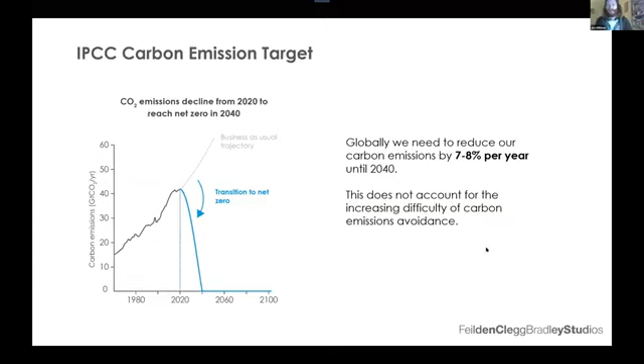Now, I don't show you this to say, gosh, it's insurmountable, let's just call it quits. Actually, it is really achievable, but we need to think about it and make direct actions towards it. It is entirely doable. There'll be a bit of technology, and we'll have to address a lot of our common concepts and things we're used to doing, but everything needs to start with numerical evidence, which is why it's so great to talk about these things today.

So net zero carbon is something that's touted around. I'm not going to delve too much into this. This is the UK Green Building Council net zero framework. Really very good, probably the only kind of framework that's currently out there in the UK. There are other bits kicking around, but this is really quite a robust one. It has 2 sections: construction and operational energy, which we're going to talk about.

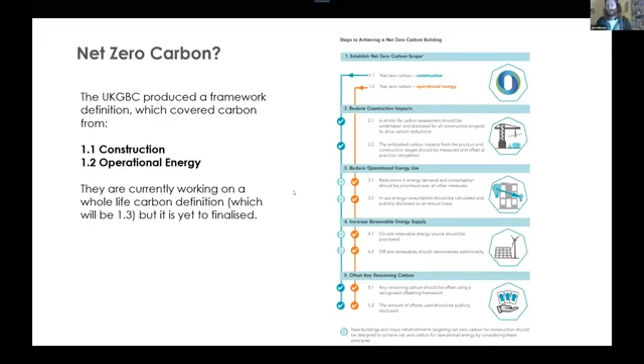Because it's not always like that. We're getting to around a third of the year, tends to be around that kind of area. So it tends to be renewable over a third of the year. It's quite amazing, and we are getting a lot better from it.

And if you look at it hour on hour of the day, you can see those peaks and troughs when it gets windy and sunny, when people use lots of energy. And there's a really interesting point - so Adam mentioned thermal batteries when we were chatting earlier.

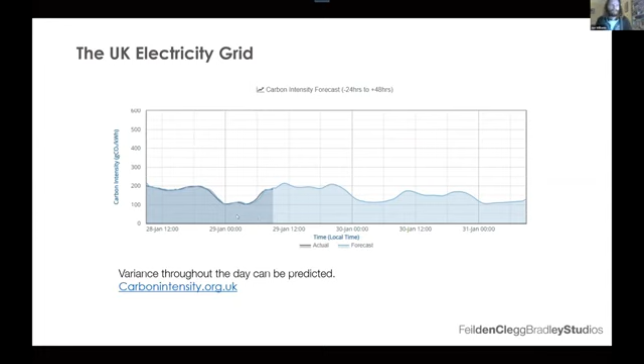You can see there's a reason batteries might be useful. If I start to get energy when it's low carbon and then release it during the day, all of a sudden maybe you can halve your carbon footprint. And similarly, I can also schedule stuff to run at night. So rather than running my dishwasher during the day when it's high carbon intensity, I can run it in the middle of the night. It'd really annoy my neighbors, but it's probably the right thing. I'd halve my carbon footprint for my dishwasher or whatever else. What an amazing idea - really super simple, just a timer plug.

But this is what's driving our push towards electricity. If you install an electric system now, in the future it will become nearly zero carbon. It never quite gets to zero - there are lots of complex grid effects that caveat that.

So you can see already we're going to be looking at things like changing heating technology, moving away from gas boilers, ideally aiming for heat pumps. There's a big caveat here as well - we could use electric radiators. If you can get your heat load down far enough, actually electric's not so bad. But heat pumps really are the future. Every kilowatt of energy you put in, we can get 2 or 3 out for heat, from thermodynamic magic.

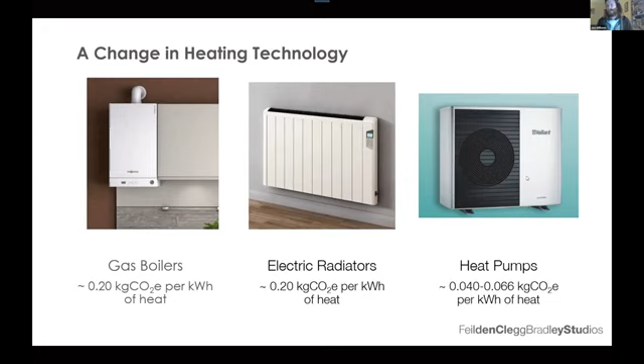We can't just avoid the fact that we can't build rubbish buildings that need loads of heating. We still have a fixed capacity for how much energy is in that grid. If we don't pay attention to that, we won't have enough renewable power, and therefore we'll never have green grids. So we still need low energy buildings. And this is what that 35 from LETI - that's where that figure comes from. That's what we have as an acceptable allowance for new buildings.

So we still need to use things like heat pumps, all these little steps. I'm sure James went through these - have a look through the Climate Emergency Design Guide, have a little review of it. It's got some great stuff in there.

And once you've got all that done, you can throw a PV panel at it and your renewable tech. This is a little table I use - this is for Leeds, it's as close as I can get to Sunderland. It's not too far off.

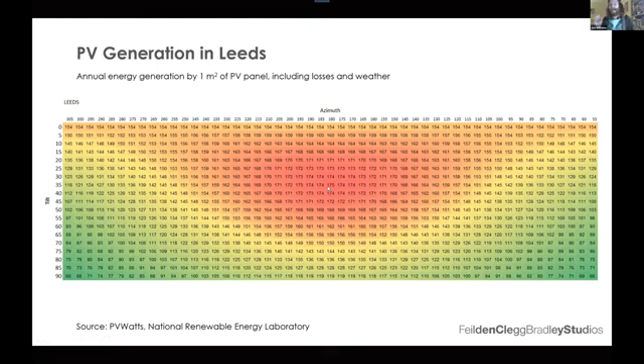It's probably fine - actually Sunderland is probably slightly sunnier than Leeds because it's on the other side. But this tells you what way your solar panel is facing - so 180 would be directly south. And this tells you the tilt - so 0 degrees would be completely flat and 90 degrees would be perfectly vertical. You can see exactly how much your PV panel, including all the losses and conversion bits and pieces, will generate for you per meter squared. So a really useful little table - you can see how much you can generate from there.

So that's enough about operational energy - you've already heard lots about that. We're here to talk about embodied carbon.

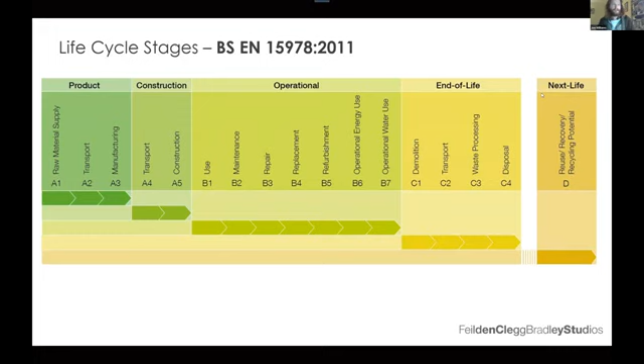Jane is going to talk far more about this, and it's probably a slightly more accurate version of this table. I call this Next Life because it seems a bit more friendly. We're going to talk a lot about these bits, so I'll skip on because it'll become clearer later.

What we're really saying is with these buildings, it used to be that two-thirds would be operational energy. When we look at ultra-low energy buildings we now have to design, it's actually nearer a quarter for a house. But 50% of the carbon emissions from that building over 60 years will be emitted even before it's left the factory.

The contractor hasn't touched it. It's still sat in a warehouse waiting to be bought, waiting to be used, and 50% is already gone. Then you can see these bits: transport to site, wastage, then maintenance-related aspects like ongoing replacement and refurbishment, and about 2% depending on what happens at end of life. So it's really important to capture these bits. Where do we need to focus these aspects?

A lot of it is related to the structure—that tends to be where it is. It depends on the scale of building. When we look at big offices, it's nearly all structure. But as soon as you get down to smaller houses, your structure becomes your facade, and you find that your facade is working incredibly hard. As a consequence, you can have an awful lot of embodied carbon in it, particularly per floor area. It's a useful starting point.

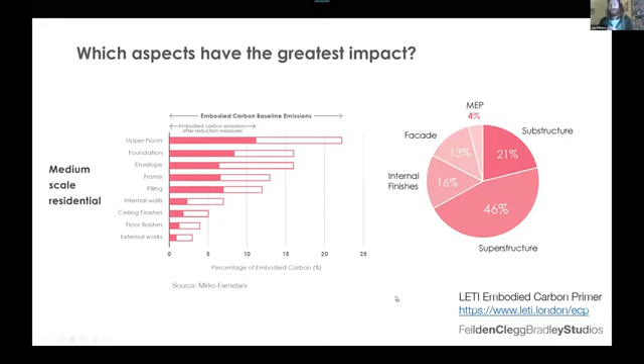Again, this is from the LETI Embodied Carbon Primer—well worth a read, it's got some great figures in there. I'm sure Jane will talk a bit more about some of these bits.

Before I hand back to Adam, I just thought I'd give you a quick idea of some really simple embodied carbon actions from the LETI Embodied Carbon Primer. ACAN have got a new guide coming out very soon on embodied carbon which looks amazing, well worth a read. I think it's coming out soon—I'm sure Seb or Sam can pop something in the chat.

Firstly, build less—do you need a new building? That's the big thing. Build light: reducing the weight is an easy win, and you also save costs. Build wise: look at the site constraints, what do you need to do?

Build low carbon—where you have to use a material, can you use a better one? Build for the future too, with dismountable, flexible designs; we put a lot of resources in, so can we make sure those resources are useful in future? And build collaboratively—we quite often sit in our own silos, which is why this competition is so exciting, working collaboratively to get the best responses. It shouldn't be architects designing the building and engineers just making it work; we need to work together to find the most optimal solution.

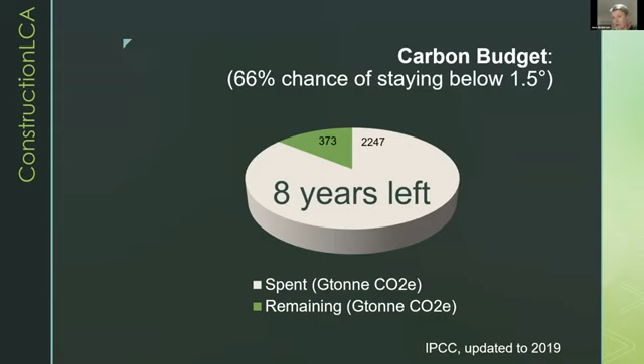The slower we are, the more we're going to have to do to mitigate and, if you like, dig ourselves out of the hole by trying to reduce the amount of CO2 in the atmosphere by even more drastic means, rather than just being able to reduce our emissions.

So, you know, when I first started looking at these kind of things, I did my master's and started down this route in 1997. If we'd started trying to reduce our carbon emissions then, we could have had a nice, slow, gentle curve. Unfortunately, we're now here where this curve is really, really steep. And everything that we do has got to be, you know, we've got to do the maximum. So it's unfortunate, but we really do have to act like our house is on fire, as they say.

The other reason why embodied carbon is really important, we call it the lock-in effect. If you think about when you're designing a building, if you're looking at operational carbon, whatever system you put in, you can put more insulation into your loft, you can put a more efficient boiler in, you could swap from your gas boiler to an air source heat pump in the future, and the grid is going to decarbonize. So it's better if you really act now to put as much insulation into your building and really focus on reducing operational carbon. But it is possible that you're going to be able to make changes.

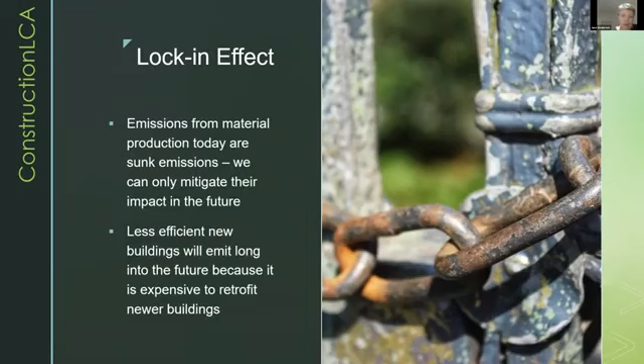And then we transport them to the site, and we look at the processes that actually occur on the building site. And we call this upfront carbon. So it's basically carbon that happens before you actually get into your building. And embodied carbon is upfront carbon, and then all the carbon that's associated with building materials through the life of the building. So any repair, replacements, maintenance, and refurbishment.

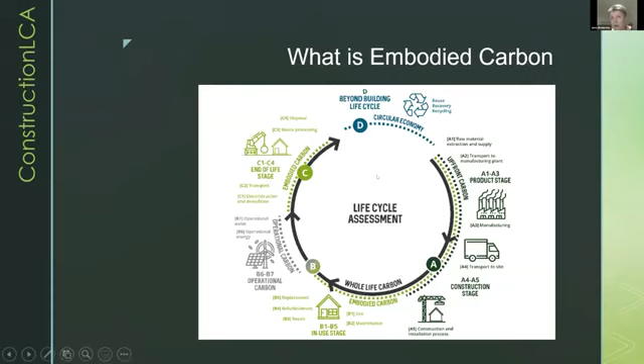Why is it important? Jack showed you the 11% in terms of global emissions from construction. In the UK, there's lots of different figures, but somewhere between 7%, 10%, maybe even 15%. It kind of depends how much you're taking into account things like imports and how wide you go and how good the information is. But it's certainly a substantial part of our impacts, and there is nothing at the moment that's limiting that in terms of the impact of buildings.

Jack showed you a breakdown. I'm going to show you another one. This is for a house. Again, a lot of the impact here from foundations and the ground floor, the kind of structure for a house. You've also got the external walls, internal walls, and then the windows and the roof. And then this is MEP and services, so things like your boiler, the pipework, electrical systems, and then floor coverings, finishes, paints, things like this.

And again, in terms of the balance, this was a house built to above building regs, but you're still seeing that the operational carbon is a lot. And that again is why there's real focus on reducing operational carbon. Rightly, the building regs don't go anywhere near far enough, but we also need to address this embodied carbon. And in studies where people do look at this, it's very often very easy to make reductions in embodied carbon of 20, 30, 40% without any additional cost, just because it's something that people haven't looked at, and there are lots of ways of making those savings.

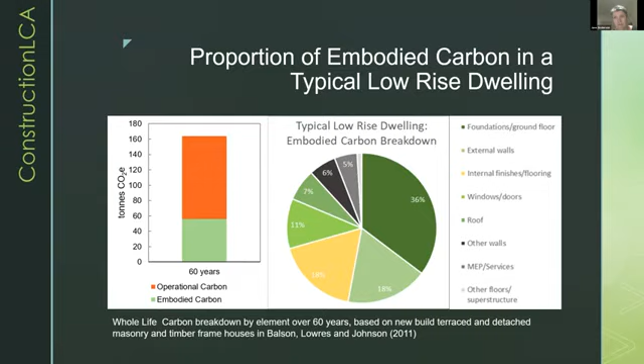What are the benefits? So again, if you're looking at trying to measure and then reduce embodied carbon, it's very often linked with cost savings. One of the biggest ways of trying to reduce embodied carbon is looking at efficiency, not wasting materials, not using too much material, trying to get a material to do more than one job. And if you're able to use materials more efficiently, then that will come with cost savings.

It hopefully is a good thing in terms of meeting climate obligations. We've done work with housing associations recently, and they're now able to actually access much lower rates of interest if they're able to demonstrate that the housing that they're producing is really good in terms of the climate impacts. So it actually pays back in terms of getting money to build more cheaply. And it has benefits in terms of the circular economy, because materials that have higher recycled content or that can be recycled will generally also have lower embodied carbon.

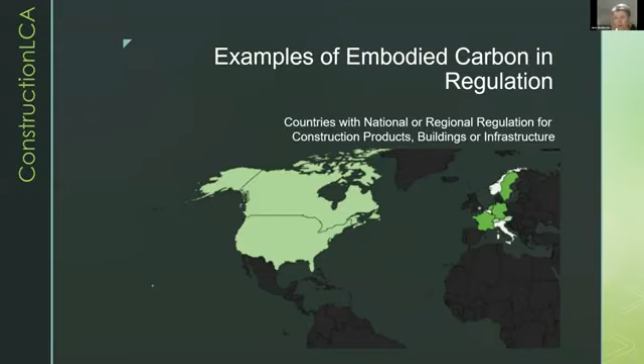But in lots of other countries in Europe, in France, in the Netherlands, in Finland and in Sweden, they have regulation. They are required to report embodied carbon, to make reductions and to meet particular targets. And there are other countries, Belgium and Italy, where they link to embodied carbon in their regulations for some of their products. And there are also lots of places in the States and in Canada where they are focusing on this and have requirements for either products or their buildings. There is a great resource called Embodied Carbon Policies that tells you all about the different policies that countries, cities and states are using.

I'm quickly going to run through how we look at construction products, because that's obviously what buildings are made of. So how do we do that? The way that we do it is using life cycle assessment. But we have something called product category rules, which make sure that when we assess products, we're using exactly the same method so that the results are consistent and we can make comparisons. And the result of that is what we call an environmental product declaration, or an EPD. These are the pieces of information that give you the data on the embodied carbon of products.

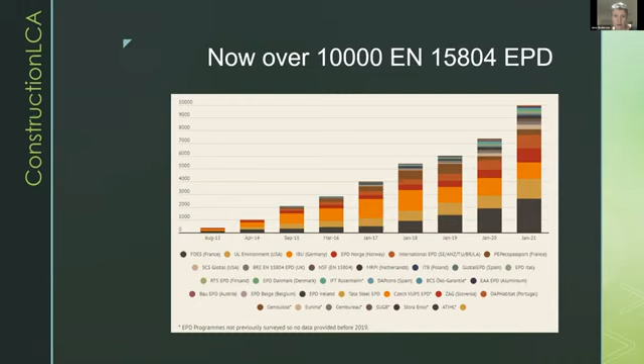There are, in fact, another probably 30,000 EPD that are using an international standard. Most of those are for concrete. In the States, there are now just thousands of EPDs for concrete, because there are tools and ways of searching for them that make it possible to actually try and find a concrete with a very particular environmental performance and technical performance within a certain number of miles of your site location. So we've seen it really explode in the States, and hopefully at some point that might happen here.

This is just to give you an overview of all the different types of products. There are a lot of insulation EPDs, lots of floor coverings, but pretty much now there is an EPD for almost every product. You do have to look for them. I'll give you a link to an information paper that gives you some ideas. There is one coming that's actually talking specifically about UK products.

I think the easiest thing is to have a very quick look at one, and hopefully this will work. So can you see an EPD icon? That's great. Excellent. Okay, sorry. Make it take up a bit more screen.

So this is an EPD for UK produced brick. It comes from BRE. The important things to know: EPDs are verified, so somebody's actually checked that the data makes sense and that the PCR that I mentioned has been followed, so the data accurately follows the methodology. EPDs will tell you who's produced them. So this is for the Brick Development Association. It'll tell you when they're valid, so you know that they're relatively recent. And they also tell you what rules they've followed, who's done the work, and what they cover.

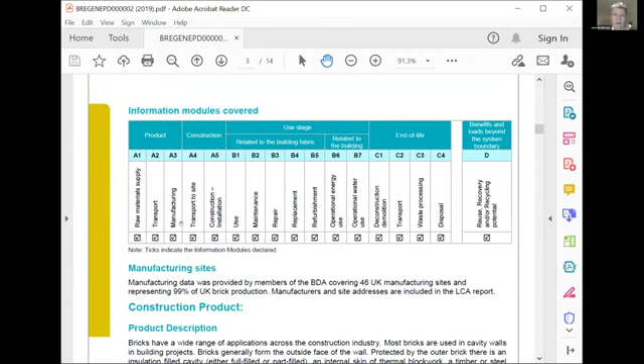So this is for 1 ton of brick. It's telling you all the impacts over the life cycle, and it's the UK sector average. So it takes data from all the manufacturers in the UK, and that's the proof here that it's been verified. You saw the list that Joe Jack showed you. Again, each of these are ticked, so it's giving information over the whole life cycle for the product. It's telling you that it's come from 99% of the UK brick manufacturers, 46 sites. So it's an EPD with really good coverage.

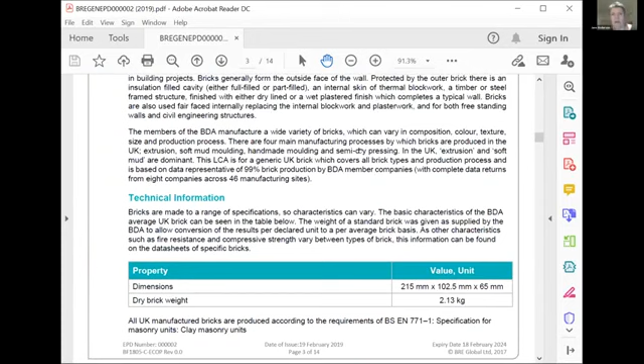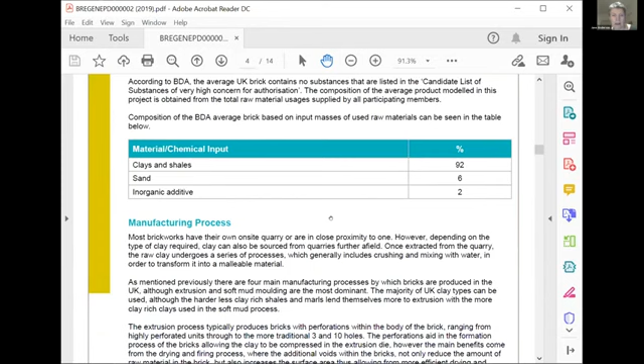It tells you what a brick is. Maybe not that useful for a brick, but it can be really useful for other types of products to make sure you've got the right thing, and explains technically the size of the brick, how much they weigh, what standards they meet. What goes into it for a brick is basically clay, sand, and some inorganic additives, and how you make it. And you've got a nice picture there as well.

So EPDs follow different formats. All the BRE EPDs look like this and are in the same order. Different EPDs in different countries will have different formats and different orders, but they will all give you this type of information. So once you know what to expect, you'll find it. This one tells you how long the product is likely to last and what's going to happen to it at the end of life. You've got this repeated, it's for a ton.

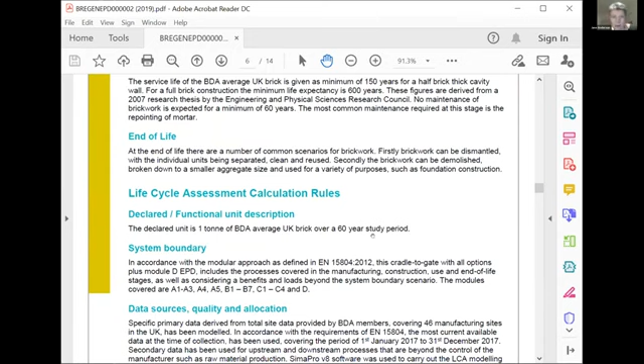And then where they got the data, who gave the data, how they collected it, and what tool they used, and basically that this one has included all the processes. EPD have to include 99% of the impacts where the manufacturing occurs, and they're not allowed to exclude anything intentionally.

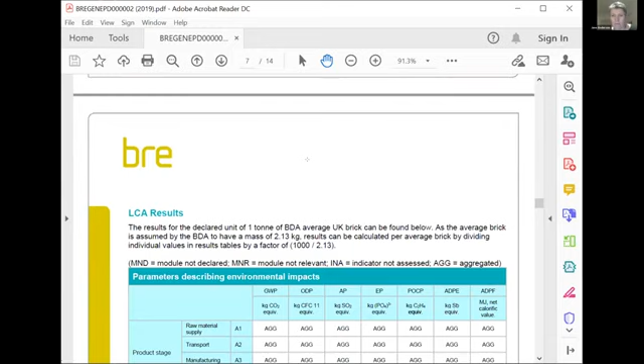So that should be the same thing. This is the meat of the matter, where you get the environmental impacts. And GWP, global warming potential, this is basically your embodied carbon.

It doesn't say embodied carbon, but you want to look for the global warming potential, and it's measured in kilograms of CO2 equivalent, which is the same unit as embodied carbon.

So for this EPD, they've aggregated the impacts of extraction, transport, and manufacturing. This is what we call cradle to gate. So one ton of bricks releases 213 kilograms of CO2 - that, if you like, is the embodied carbon of a brick when you make it in the factory.

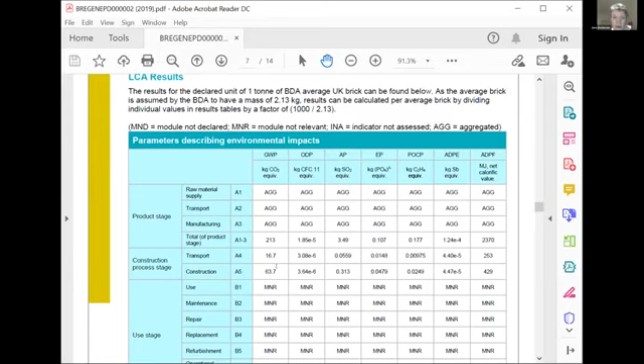Its upfront carbon would be all of this impact here - the transport to site, assuming a certain amount of wastage on site, and the impact of disposing of that, or taking it to be treated, recycled, and crushed, for example, for use as aggregate.

These modules here, they say 'module not relevant'. Basically, once you've put a brick into a wall, you actually don't need to do anything over a 60-year life of a building, so there is no information recorded here.

At the end of life of the building, then you've got the impact of taking it to recycling and then waste processing, and a very small amount of it going to landfill, and then you've got the benefit here from being able to recycle it.

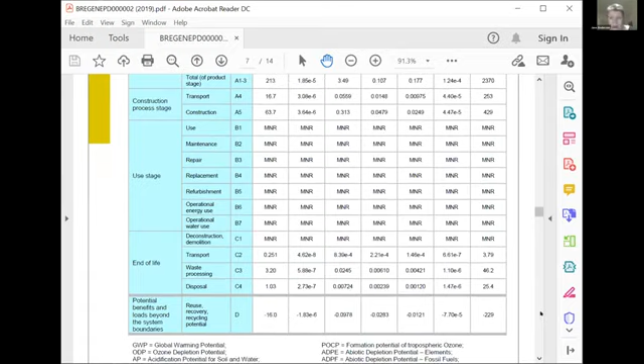There are lots of other indicators. I won't go through them because they're not particularly relevant to embodied carbon, but there are lots of other indicator results.

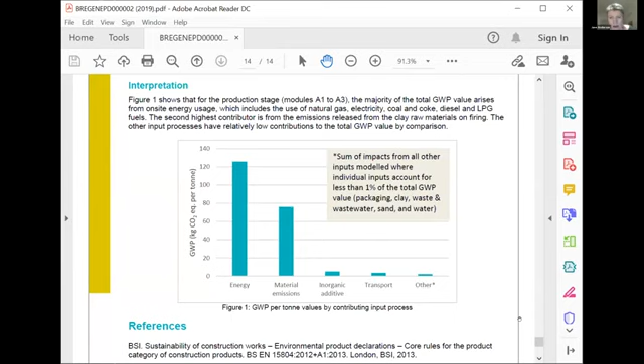And then at the end of it here, it actually describes these scenarios, so exactly how far bricks travel and what happens to them at the end of life. It gives you some quick graphs so you can see what's causing the impacts, and then it's got some references.

So that's basically a very quick view of an EPD, but effectively you want to look for the GWP information if you want to compare the embodied carbon of different products.

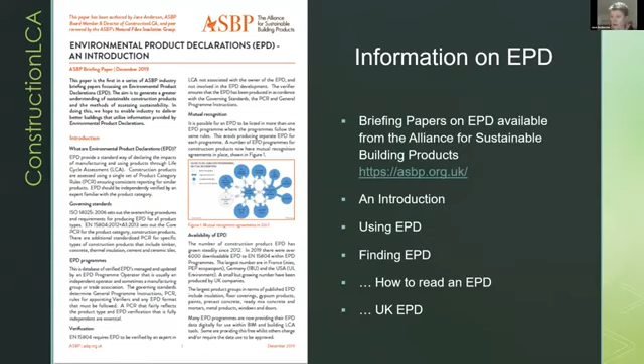Other sources of embodied carbon data include the Inventory of Carbon and Energy, a database that Craig Jones produced as part of a PhD and that he's now updated at Circular Ecology. For the main core materials, like timber, steel, concrete, glass, and gypsum, he's used available EPDs to generate typical values for common materials in the UK. So it's what we call a generic data set.

For other materials, it's using older data, although he's in the process of updating that, and hopefully there will be better information, but I'm afraid not for this project. This type of generic data is good when you don't know exactly what product you're going to be using. When you get to your detailed design stage, then it's really useful to start looking at individual EPDs and try to find the very best product of that type.

So, embodied carbon for buildings. The really important thing when you're looking at measuring and reducing embodied carbon is that the sooner you start, the more likely you are to be able to make big savings. This embodied carbon reduction potential is really, really big when you're in the planning and concept design stages. It gets much lower as you get through design, and when you're actually building, it's really limited what you can do to reduce embodied carbon at that point.

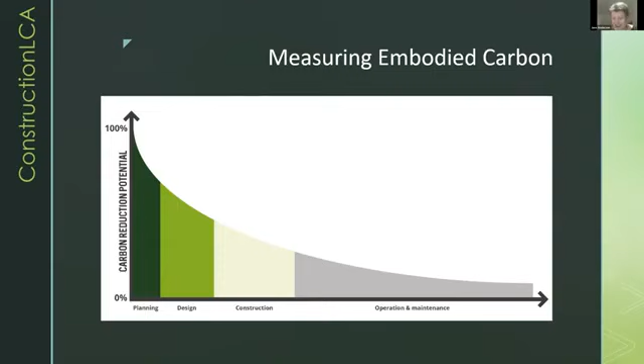Then you've got small opportunities as you're going through the life cycle of the building to make changes when you're replacing and maintaining components. But here is really where you need to start. So it's great because you're right at that point right now. Hopefully this is information that will be really useful.

It's their professional statement on whole life carbon, and this basically gives you all the default values for how far to assume goods or materials are transported before you actually work out which factory you're going to get it from, what to assume for the recycled content of steel, these types of things. So this is a really good guide.

And a lot of the tools, so the tool that Joe Jack is going to show you, is following this methodology.

Here again you've got this breakdown. So the building is using the same modules broken down into the product stage, this upfront carbon. Then we've got the in-use and end-of-life stage, and then this module D and the operational carbon. So your embodied carbon is everything in here, and your upfront carbon is just these first five modules from module A. The other thing to know, probably too much information, but in upfront carbon, when you're looking at products like timber that store carbon in them, that stored carbon is not included in your upfront carbon, because you're not looking at what happens to it at end of life. But in embodied carbon, it's included as the benefit of the carbon storage coming into the building, and then it's released at the end of life.

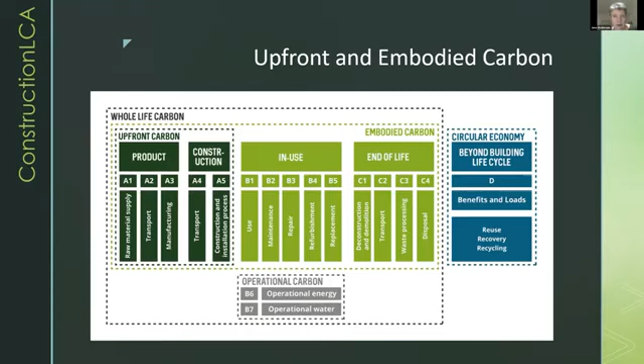So I've got a complicated way of trying to show that in a diagram, but it's too complicated at the moment still. There is lots more guidance.

Joe Jack mentioned the LETI Embodied Carbon Primer. It's a really good introduction, and it's got lots of really useful information at the end about different materials and about reduction strategies.

There are lots of embodied carbon tools, and lots of them are free. If you're students, probably even more so. Joe Jack's going to talk to you about FCBS Carbon. There's also eTool, which is free, and the tool that Tim Martel is going to talk to you about, the Passivhaus RIBA AECB tool.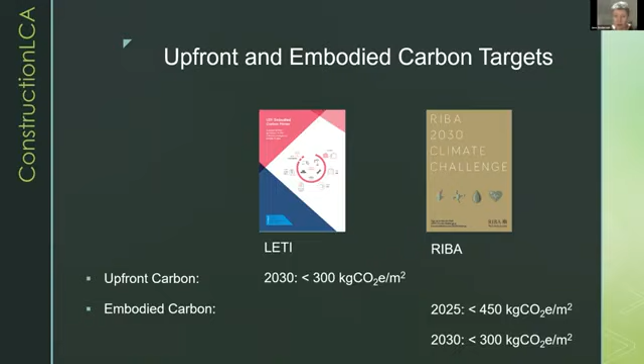It's a really good idea if you can minimize the energy demand that you have. If you really focus on that, then you will need less PV and potentially less battery to operate your building, and you may find it easier. So it is a real challenge, but it would be really good if you could be getting these kind of scores.

Embodied carbon and timber - I've talked a little bit about this. Basically, each cubic meter of timber sucks up 1,000 kilograms of CO2 and releases quite a lot of oxygen as well. So it's storing just over 250 kilograms of carbon within it, but a ton of CO2.

If you put it into your building, it's basically stored out of the atmosphere for the life of your building - we say 60 years, might even be longer. And at the end of life, it's even quite likely that it could come back. For example, structural timber can be chipped and put into chipboard.

They could be reused as rafters and beams, or chipped and put into chipboard, and then used in furniture or flooring, something like that. Then they've got another 15, 20 years potentially in a building. So it is a really good idea if we can do that.

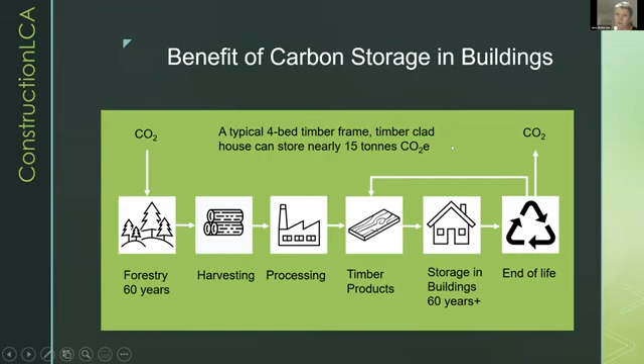A typical 4-bed house can be storing nearly 15 tons of CO2. So this is using timber efficiently.

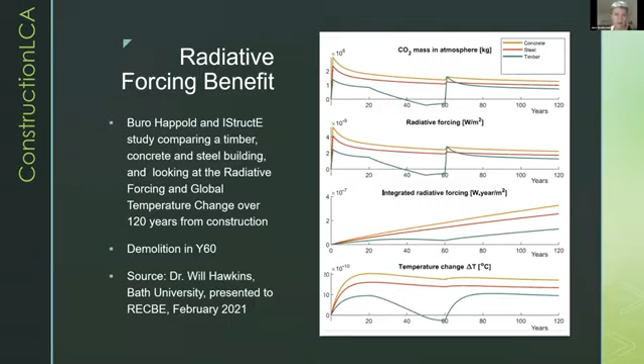So good luck. Think about what you're going to do, design well, then assess it, review what you've got, look at the hotspots, try and reduce it, and just keep going through that loop, and hopefully you will achieve your target. So thank you very much.

Thank you, Jane. That's really interesting. It showed us just how much detail there is. I had a couple of takeaways that I'll just flag up there.

One for me, I was really interested to hear you talk about the simplicity of buildings, because actually the simplicity of buildings has real advantages for operational carbon as well. And you know, all you've got to do is look at some of the award-winning Passive House schemes out there to see that actually simple buildings aren't boring. They could be done exceptionally well.

And the other thing that you highlighted, which really resonated with me, was the importance of collaboration with M&E engineers and structural engineers, and how this is a real team effort to make real inroads into embodied carbon. That's one of the great reasons these design teams are running this competition. So I look forward to seeing some of the results.

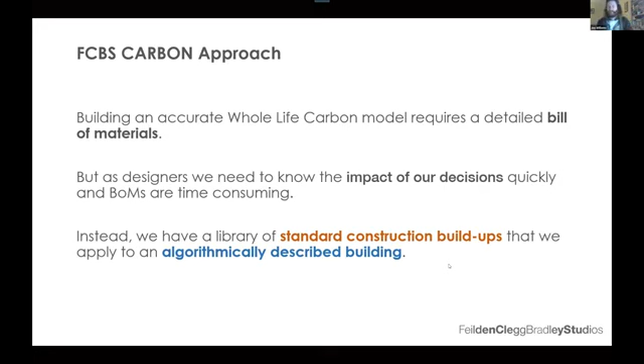And we did it for 3 reasons. We made this tool - one was just to kind of record the details of the projects. We wanted to know how we were doing. Seems like a simple question, but it's kind of difficult when you've got 4.5 offices, 200 people. Keeping that going is quite tricky.

We really wanted to be able to estimate the whole life of our projects. But also, I think third is to understand how it works. We've got a long history of sustainability, and that's absolutely great. But we're always trying to keep on top of these things, and we need to be able to educate everybody in the practice and let them find things out.

It's great for me to talk and tell you, you should use 70% GGBS for your concrete or whatever else it is. Actually doing it, you'll find out so much more. So I needed some way of enabling the architects in the practice to do it.

And I realized that people didn't really like BIM or Revit, and they didn't really like all these kind of plugins for tools, and I'm not the greatest developer in the world. So I made it in Excel, because everybody loves an Excel sheet.

And the key thing here is that it's not ridiculously accurate - it's kind of fine - but we need to understand the direction and magnitude of changes when we make a design choice. So if we go from, going from a basement to having an extra story on top, is that better or worse? Actually, it's quite a difficult question to answer.

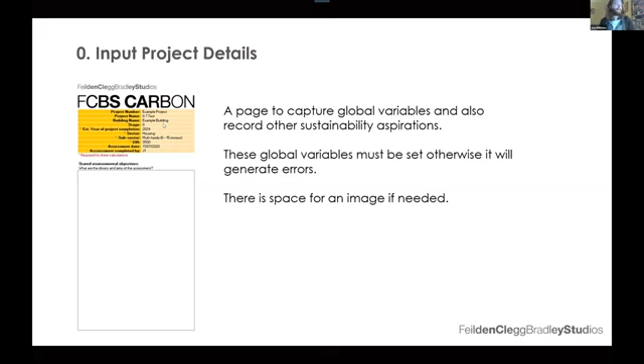It's kind of live. So we input operational energy. This is the least smart bit of the spreadsheet. It's got a nice snazzy color scheme, but that's about it. It's got some nice graphs as well, I suppose. You just have to manually pick it.

There's a bit here which is benchmarks, and it'll tell you what we think the industry is doing, and this is based on kind of CIBSE, or in this case for housing, it would be based on a bit of study done by Etude, just showing where you are. Now we have a kind of target that we're going to be aiming for. We're all aiming for 35 kilowatt hours per meter squared per year because we're all going for the kind of LETI targets. So that's a nice easy win, we'll pop that in. The very fact that it's very difficult to get to is another story - we'll come to that at some point.

And this is the kind of clever one. This is the one where all the stuff happens. You have a bit here where you put in building parameters, sort of general global parameters for your building, if you like. And then down here, you can select all your materials, and I've got a preset list. You can say whether it's new, whether it's existing, so you can use replacement bits. You can say if it's old, how old it is. You can say how long it's going to last for in terms of component life.

You can use this adjustment factor, which for all intents and purposes is a fudge factor, which makes it work for your building. And design for disassembly. So if you're going to have design for disassembly, we can start to capture those elements and represent them as a benefit beyond the system.

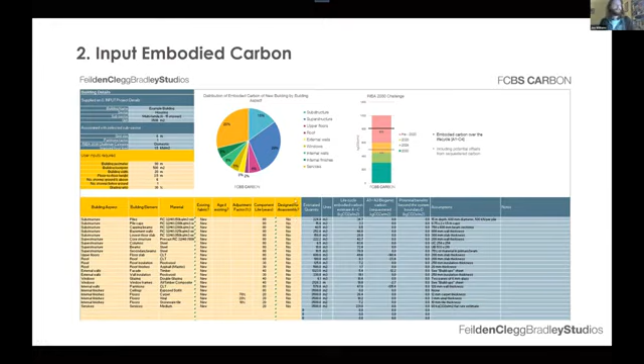Just so you know, where we say your facade is going to be ceramic cladding or whatever else it is, there is a whole model that sits behind it. So we have ceramic cladding, but we also have the steel framing system that holds it in place, and all those bits that hold it back to the wall. So all of that comes in there. So whenever you pick a material, there's actually a little bit extra within there.

And these are from ICE data. So Jane mentioned the Inventory of Carbon and Energy from Craig Jones and Circular Ecology. We've used those mostly. Where we don't have a good bit of data from there, we've used a particular EPD. But for all intents and purposes, it's generic data. The impact of that is if you model your actual building and it comes out slightly different, it will do. You've got the real quantities, you've got the real products. It might go up, it might also go down. So just always caveat that.

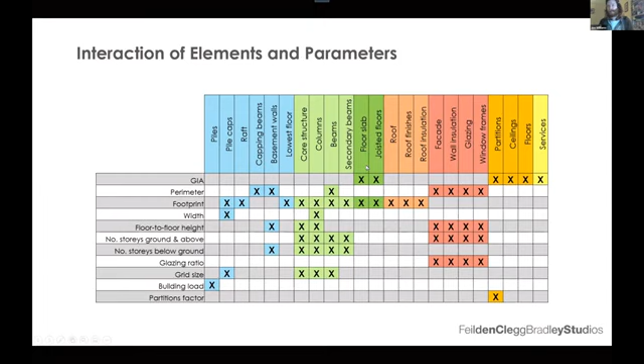This is a really useful table. It should be in the guide, and I should really put it in there. I've just updated it, so I'll be able to do that tonight. When you change parameters, these parameters here, these are the bits it impacts. So when you change these, just make sure you're seeing. So if you're thinking, oh gosh, I wish I could change the embodied carbon on my floor, check the GIA, check the footprint. These are all things that will factor into your floor slab and your joisted floors. So have a look at that. It's a useful tool. We'll send these slides anyway, so you'll have a look.

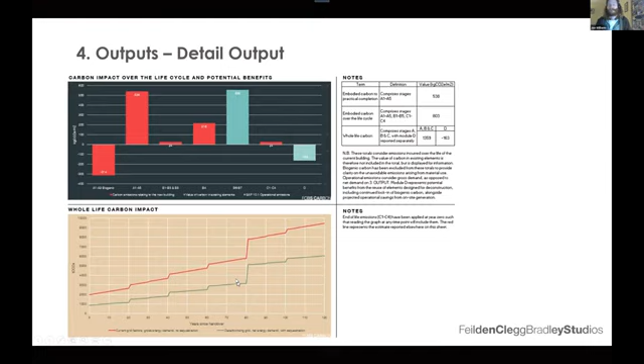I quite like this graph as well. This is showing you all these life cycle replacement aspects. The red line there is your worst case scenario. It's using the current grid factors for your energy. It doesn't have any renewables involved, and it doesn't include any sequestration. If we include sequestration, this is the green line, so it starts a bit lower. We have a decarbonising grid, so the lines split apart. And also we're able to include things like renewables, so PV panels and that kind of stuff.

So with that out of the way, that's my prompt to open a spreadsheet up. In fact, before that, now I work for a leading architectural practice. Well, I'm actually an engineer. You would never tell. This is my submission to the competition. And you will also quickly see that I'm absolutely terrible in SketchUp.

So this is on a 6x9, kind of a familiar size. 3 stories, it's 3 meters high per floor, kind of fine. I haven't put any windows in, but I didn't really know what to do with it. There's no roof lights, PVs or anything. Maybe it's terrace, maybe it's not. There you go, kind of great, isn't it? I mean, I should do this for a living.

But when we get to the FCBS Carbon website, so I presume you can all still see this. I put in some things here, so I put in a project number if you want to use that for your records, and project name, the terrace, I've called it my terrace. I've put it stage 1, I reckon it's going to be finished 2023, that's when it's all kicking off in Sunderland. Here you can choose the sectors.

Now the limited one we send out only has housing and offices, others are in development, and you can kind of choose what it's going to be. Is it going to be a single family house or a flat or a multi-family kind of thing? You can kind of get an idea, and you can swap and choose. It doesn't make a huge amount of difference for some things, but things like predicted energy use and grid sizes, it might make an impact.

My house is going to be 130 square meters. There's no particular reason, it just is. I think it fits into that building form. I probably should check that. And some kind of bits. You can put some environmental objectives in here. It's worth putting these in. It's part of the RICS guide. Actually you should have a bit of text in there to tell you why you're doing these things.

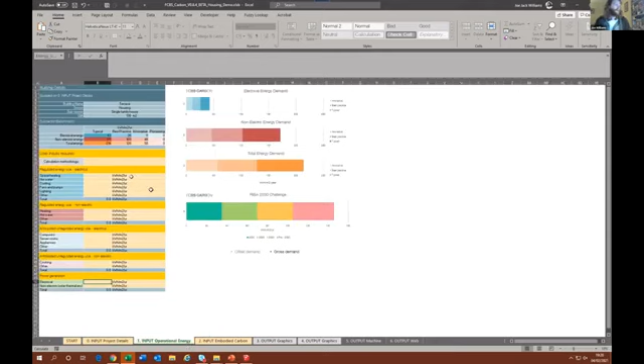So input energy. So it comes in looking like this, and I'll zoom in a bit so you can actually read it. These are your sector benchmarks. So if you remember, LETI target was 35. This is an innovative building according to current building standards. Not building standards, but built buildings. This is actual data. We'd be in about 58 would be our kilowatt hours for total energy. Ooh, it's going to be a bit tough, isn't it?

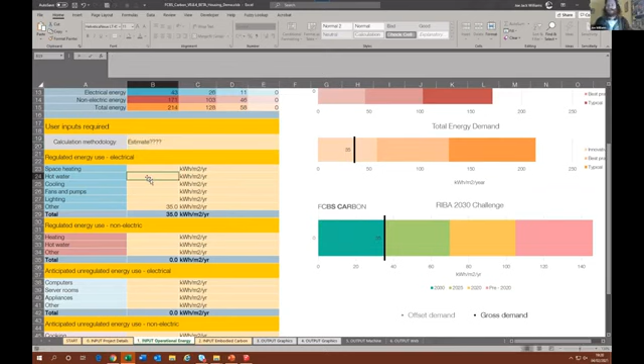Anyway, so we're going to aim for 35, and I'm going to shove it all in regulated energy use. And it doesn't really matter where it goes. You could chuck it in any of these. I avoid putting it in the non-electric because that's technically gas. I'm going to make a little note for me here. Estimate. A couple of question marks. I don't know where it came from. It came from LETI. I do know exactly where it came from, but there you go.

And down here, you can add in things like PV power and generation. So there's a website called PV Watts. If you download FCBS Carbon, it comes with a guide and it tells you where you can get this kind of information from. I reckon, and we saw that little table we had before, we can probably get, I don't know, 20. Finger in the air kind of guess. We can always come back and change this.

It's just a number. No, this is per meter squared of the building GIA, not per meter squared of panels or anything. And we can see how we do. So I'm hitting the LETI, the RIBA target. And if we include renewables, we're absolutely smashing it. Winner.

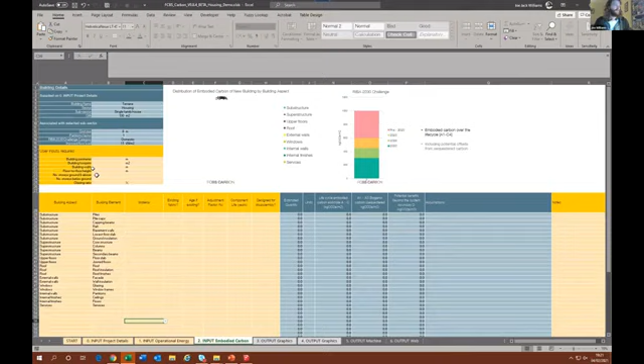So onto the fun stuff. So I'll just quickly fill this in. So we need to fill in the perimeter. So it's 6x9, so it's 6 plus 9 plus 6 plus 9. Oops. The building footprint, it's 6 times 9. The building width, we were just looking for the thinner side of it. If your building's wedge shaped, just take an average. It doesn't really matter too much. For bigger buildings, it becomes kind of useful. We make a grid off the back of it, so we'll call that 6.

Floor to floor height, that was 3. We had a number of stories above ground. We had 3 there. No, floor to floor height, I'm not including the roof. You might want to, you might not. It depends how it works. You can just put an average in. It'll help you with those guides. Number of stories below ground, 0, and I don't know what to do for a glazing ratio, so we'll just pick a number, 30%.

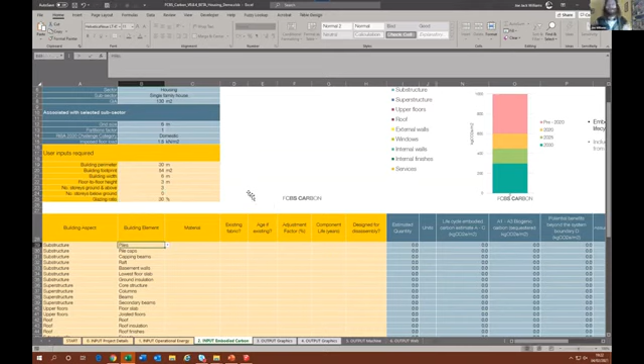That's it. That's the kind of global variables. Now we get into the fun bit of just choosing materials. Now, some of these, because this is for offices and for housing and big housing, you have a whole raft of things that you may or may not use. So we're not going to have piles because it's only a small house. We probably won't have pile caps. Capping beams is the one caveat. We might want capping beams. So this isn't really strictly correct, and this is something we're still working on. It's still beta testing, I must stress that.

We're going to use foam glass blocks. What these capping beams do, they run around the perimeter of the building, and also they run in a kind of zigzag across it between all the capping beams. What we're going to do instead is we're going to use foam glass blocks as a kind of insulation to build it up. So we're going to use that. That's for domestic only. We're going to put a raft in as well. No, I don't think we will. I'm going to put in a beam and block system. So in the lowest floor slab, beam and block. We don't have basement walls, so we don't need to do that. We're not going to have a raft because we're going to have that beam and block.

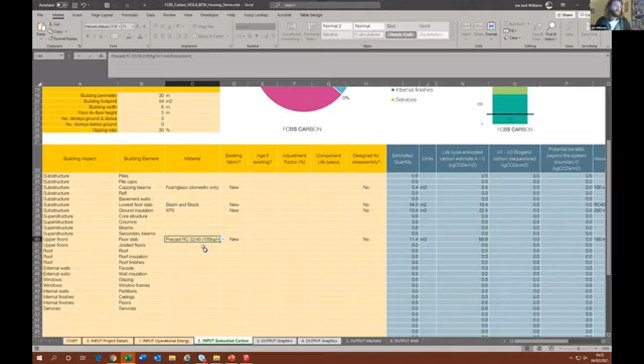Some ground insulation, let's go for some XPS. We don't have a core, we don't have any columns, we don't have any beams. It's only 6 meters, we don't need any of that kind of junk. Secondary beams, floor slab, what should we have as a floor slab? Precast reinforced concrete, why not? What an abhorrent thing to use, but why not? And we're going to go at the top as well. We've got a roof, what should we use? I don't know, let's use steel concrete composite. Oof, horrendous.

So this isn't a real building, obviously it'd be changed. This is assuming that the roof is going to be flat. Obviously it's not going to be flat, it's going to be slightly bigger. So we can start to use the adjustment factor here. Now you could do this properly if you assume your roof is flat and then work out the area of your roof. You can get a kind of ratio. I'm going to guess, because I don't have time, but 130%. Pop in some insulation, so some rock wool, roof finishes. How about a zinc standing seam? Why not? And we're going to have block work with brick, and we're going to have some rock wool.

Now, obviously, we're going to have triple glazing. We're talking about low energy. Some lovely aluminium window frames. We're going to have some plasterboard and steel stud partitions. We're going to have a plasterboard ceiling, carpet throughout. Now, Jane mentioned the services. So getting decent services figures and actually predicting is kind of tricky to do. Still kind of new at it. This just takes a bit of a flyer, so it gives you a kind of number in here. They'll tell you here. So it's medium tech, boilers or an air source heat pump, probably MVHR as well. Maybe it's about 60. It's a guess. It's more of a placeholder for when you actually know it.

So this column here is your assumptions, and it tells you all about what we've assumed within your building. So you might find it's not quite right. So you can always go in and change it. So say our slab is 150 mil. Maybe our slab's going to be 175. So in here, I'm going to do 175 divided by 150. There you go. So we've got a kind of uplift, and we can see how my building's doing. Oof, it's pretty bad, isn't it?

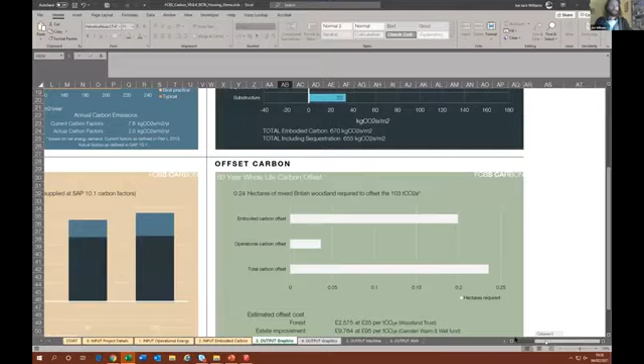Let's have a look here. So when we see in here, and I'll just zoom in so you can see it. So our total carbon is 670. Not surprising, it's using terrible materials. And we can see how we're doing up here. So this is our operational energy, looked really good. Embodied carbon side, oh, way down, not even hitting the 2030 challenge. So kind of bad. When we look at these other bits here, we can see 60 years, you know, whacking great lump. What you will notice, these are actually pretty flat.

And what we haven't done yet is look at actually kind of replacement cycles. So it's worth going back through. We'll pick some of these. So a beam and block floor, I'm not really sure how long a beam and block floor lasts, so it's 80 years and 80 years and those kind of bits. But if we start to think about some of these more key bits, so if we think about carpet, for instance, maybe it's 15 years, you know, good quality carpet. Services will last 20 years, probably.

You've got triple glazing there. Good glazing will last 25 years, it tends not to last much longer, it might last 30 if you're lucky. It just kind of falls apart. It's a bit of a shame. And we'll say that our aluminium windows will survive 1 replacement, 1 install, 1 replacement, and then they'll be going in the skip.

Our other bits, I think they're probably going to last quite well. Maybe our zinc standing seam will last 75 years, as a guess. Now, there are tables for this, and it's kind of tricky to predict. It's something we're looking at, actually how do you help with those kind of predictions.

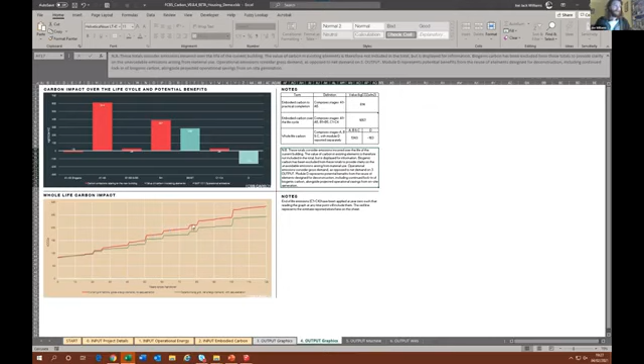And you can see all of a sudden, what was a very flat bar chart has gone very, you can see it picking up very quickly. And if we look now up here, we're way off the end. So we've obviously picked the wrong materials somewhere down the line. And if you look at this, you can see all those little replacement cycles and little lumps and bumps going ahead. But the fun with this is we can start to tinker with bits.

So maybe I want to do party walls, for instance, external walls, we'll do facade, and we'll do some party walls down there. We'll do some blockwork party walls. And I'm going to say that's going to be 50% of the walls, and then 50% is going to be wherever it is, brick facing.

We said about the glazing ratios. Maybe the glazing ratio is going to go down a bit because we're going to have party walls. It's going to be pinned in. Does make quite a difference. And I think that's about those replacement cycles. It makes massive differences. Then you can tinker with all these bits.

What if you went from blockwork and brick down to, say, something quite nice like a timber cassette panel with brick? We start to see these things come down quite a bit. So these are all make little changes.

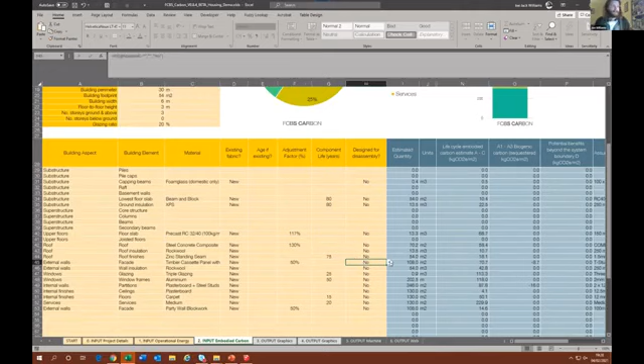You can do design for disassembly. So if we did our timber cassette panel, make that design for disassembly. Now go back to our output 4. You can start to see these things filtering through and coming out at the end.

I would say that Jane's point about natural materials make the biggest difference, and that is entirely true. The less products you can get in there, absolutely the better. So if I get rid of this and go to a timber pitch roof. The timber pitch roof, just so you know, actually already has a pitch built into it. So I don't need to put that in.

In fact, if I scroll to the right here, it's at 9 to 12 pitch, so you can kind of check whether that looks about right. There's a bit here you can add your notes in.

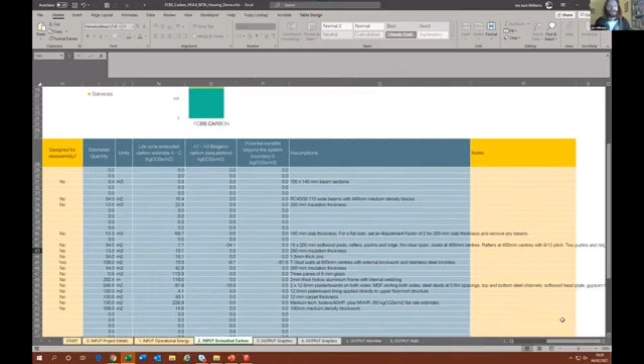And there you go. So that is the quick overview of FCBS Carbon. So in about 20 minutes, I managed to input all the data for that project and actually then start to really interrogate these things and really work out how this works.

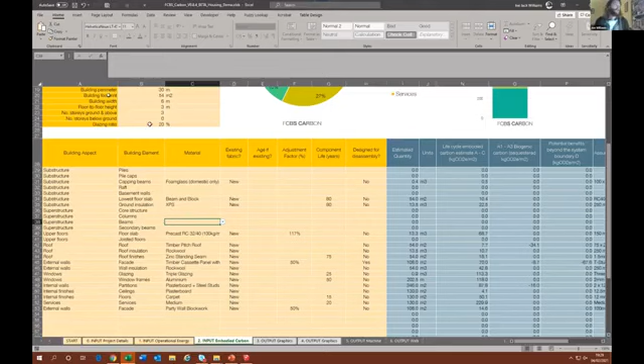And you can imagine we do this with design teams. We sit down with clients, we sit down with structural engineers. We say, look, is this right? Is this wrong? What do you think? What about this material? Okay, we can make it bigger. We can flippantly add a story on. Does that happen? We can add a story. We can make it 2 stories.

Now, the only thing to be careful of, if you do something like that, we don't change the floor area. So just be careful when you say, oh, we're going to add a story on. Well, okay, you can, but it doesn't make a difference. But you can say, what's the impact of 300 mil? So really super quick, it's all about making rough design decisions in an informed way and getting a good idea about how it all works.

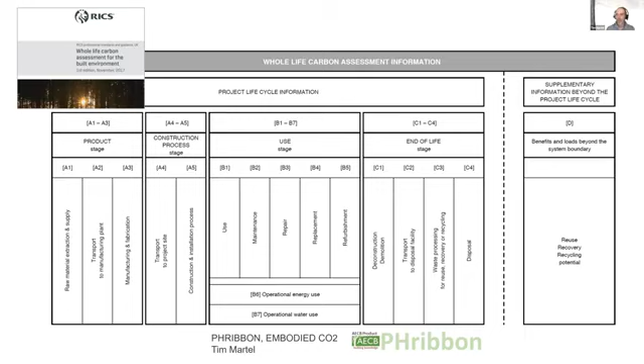That's really great. So I'll be talking about the process. Just before I start, I'll be talking about these two tools, and the majority of this talk is actually a live demo, so nothing could possibly go wrong. I'm going to just go through briefly the thinking behind it first.

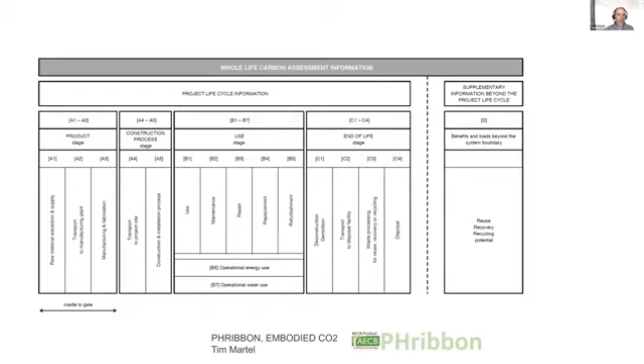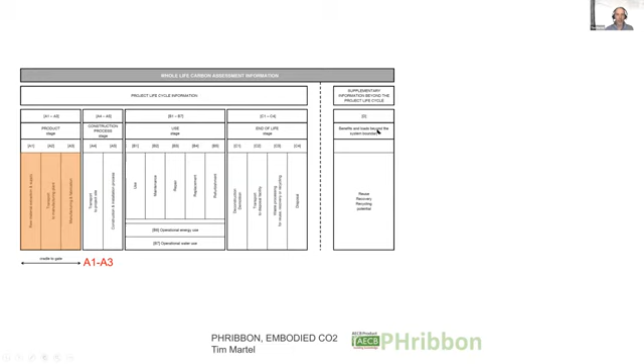So here we've got whole life carbon assessment, the RICS document where all this comes from - you should be aware of that. Both tools follow this document very closely, and it's divided into all these parts. If we were to graph what we get from sections A1 to A3, we'd get a graph I'll show you in a second. But there are also other stages: the construction process, which is the manufacture of the products, then the construction of the building, then we have use, end of life, and beyond the system boundary, stage D.

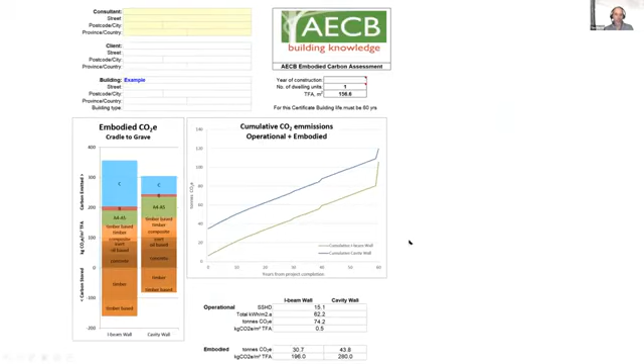So I'm going to just leap from there to the first little tool, which is here. And both the tools use all those stages, and they calculate all those stages.

So in this very quick example, I'm not going to spend too long on it. In this first one, it's just quite a simple spreadsheet.

So Tim, could I interrupt you for a moment? Certainly. Would you move the microphone a bit, just up a little? Right, that's much louder now. Thank you. Oh, okay, sorry.

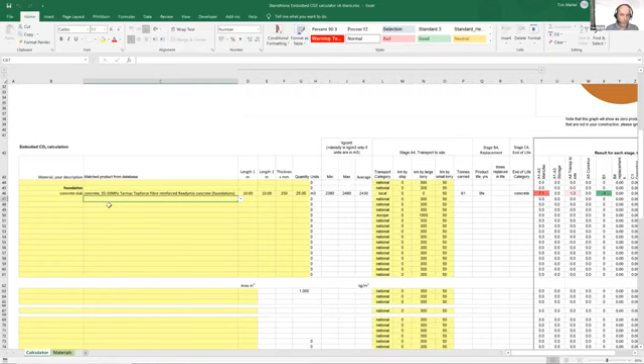Right, okay, good. So with this first one, let's just make that a bit bigger. You would select a material from the list, and it's a big long list. In fact, it's a huge list. It comes from this tab here, so there's literally hundreds of things in it.

But you could select materials from there, and then you'd need the quantity. So you've got a number of columns here which you can use to produce that quantity. When you select the material, it gives you the units, so you know you've got to produce it in meters cubed. And then you have to measure from somewhere, and there's a formula here which gives you some standard formulas for working these things out using these cells.

And then we've got to take into account transport to site, again using RICS standard assumptions: local, national, Europe, or worldwide. If you change one of these, it changes the distances of each one. So if I change that to national, it changes the distance there. But you can also adjust that if you actually know the distance.

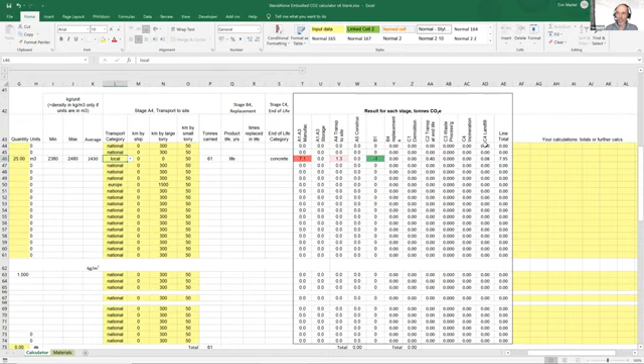And then it gives you the results in terms of A1 to A3, A4, A5, B1, B4, which is replacements, C1, C2, C3, C4, and all these other things as well. So then you start to build up a graph of that, and it's really a rather basic graph, only showing you a breakdown of the percentage of each.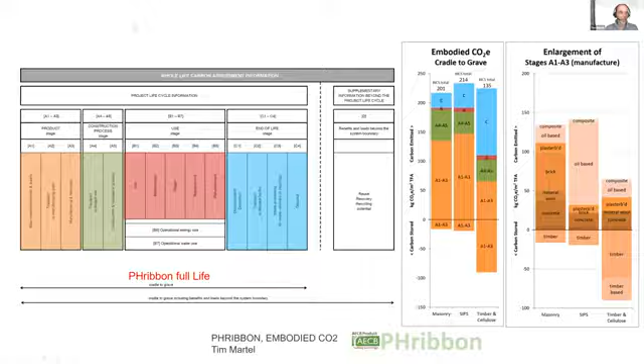If I just take you to another one, hang on, here's one that's finished.

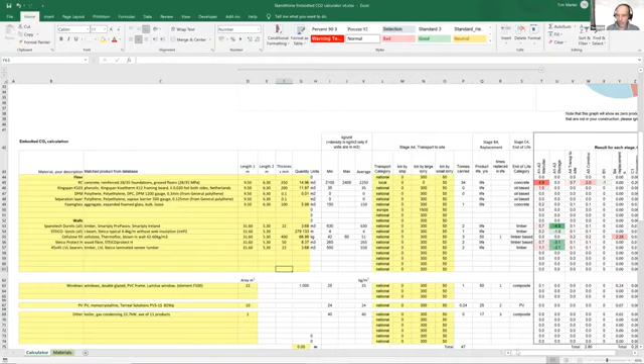So I think it's fairly clear what we're getting out of this. What's interesting though is you can actually pinpoint where that CO2 is coming from. We've got an overall breakdown here, but you can actually see from the shading in here where that's coming from. So quite a lot of it in this case, if I...

Reduce that down, I've just minimized the view slightly. So now we've got concrete there, and you can see quite a lot of that CO2 comes from the manufacture of that concrete. And here, the totals, I've left you a little further calculation area where you can summarize. You might want to know what's the summary for the floor or what's the summary for the walls. This is designed to give you a whole building, and there's some other information you've got to enter.

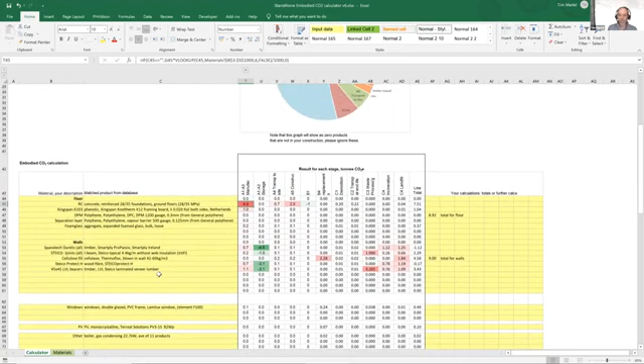So that's a fairly basic one. Now, what else could you have? Well, it's a great thing to be able to use the actual software package you use for the energy modeling. I'm going to close those for a moment.

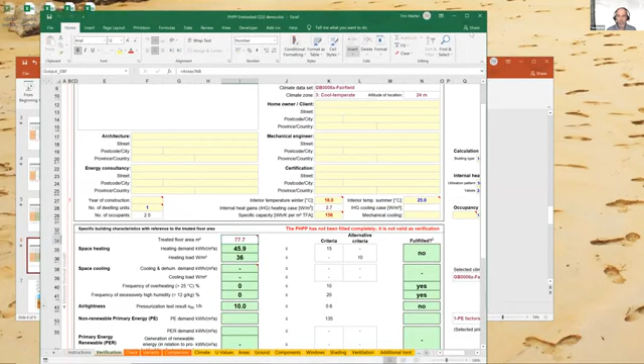If we go to PHPP, as some of you will know, it's quite a large program. It's designed to do very accurate energy modeling for Passivhaus. And here we are in PHPP. You can also do embodied CO2 calculations from within the PHPP.

It's a spreadsheet, but there's this software that I wrote for the AECB, called PHribbon, and this is it here. It's in there as a ribbon, just like any other ribbon. It gets installed as that, and the embodied CO2 is that button.

If we start a new cradle to grave calculation, I'm going to be mentioning I-beams—in case you're not familiar, timber I-beams, there's one in the background here. It has the strength of a solid piece of wood, like a rafter or a joist, but uses much less timber. It also has much less thermal conductivity from one end to the other. So it's used quite a lot in low energy buildings, passive houses.

Notice that we'll be talking about the section. If you had this installed, and you were over here and took a section, it would be all the way through insulation. If you took another section through here, it would be timber, then some insulation, then more timber. And if you took a section through here, it would be timber and timber and timber all the way through. I just point that out because we'll look at it later.

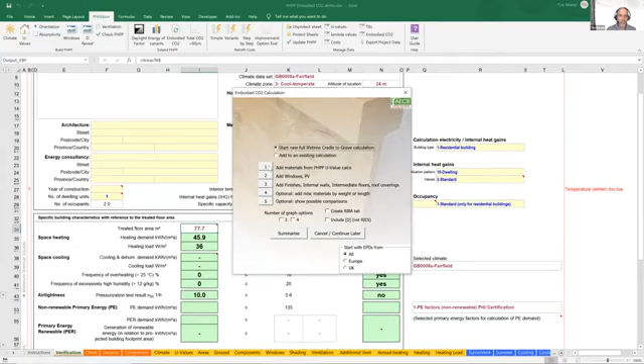So I'll start a new calculation and we'll add some materials. What it will go through is it will just match up—now the other software didn't do that. So with this one, you click on the material, and this list of materials is already in PHPP. You've already used it for the energy calculation, so might as well use that. That's the majority of the data entries from there.

You can select a type of plaster there, and then we can just carry on and let it match up materials. That one, 34, that will be that one. And then brick, we can use that one, and then we go to the next U value and it'll start putting this one in.

I don't want to run out of time, so I'm just going to cut to another bit. If you have a complicated section like this—and this is important because complicated sections—where you've got 81% of it is cellulose, 15% of it is that section I was talking about, I-beam, cellulose, I-beam, and then 4% of it is this other third section.

You can actually do that really quickly in here. You can say this section 1, we can add these numbers together and get the whole thickness of all that one. That's all cellulose, treat that all together. You can then write cellulose again—actually, I should have selected it there, it's volume filling in walls. Write that, and then this I-beam here, add that section there, and then you can add this section together as well. So you can actually do it really quickly, even something complicated like that.

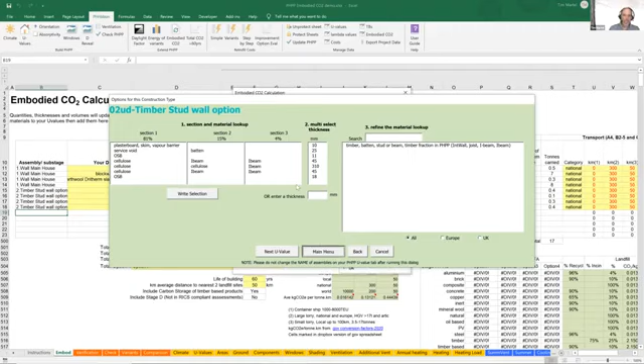And like that, there are other things you can add: windows, PV, you can add finishes. It gives you a context-sensitive menu for adding the external things which aren't actually in the PHPP. Some things like roof covering, internal walls, intermediate floors aren't in PHPP because they're not a thermal element, so it will help you add those. And then you've got heat pumps, anything else—heat pumps, cables, MVHRs, all that kind of stuff.

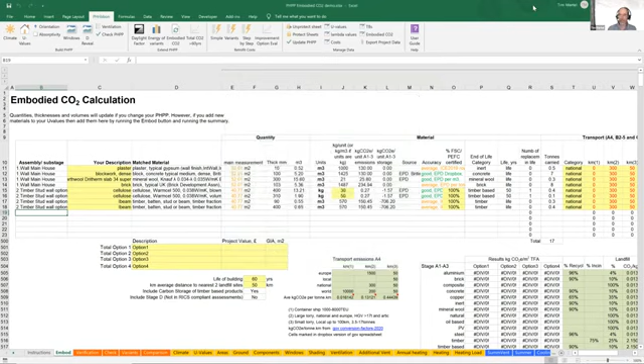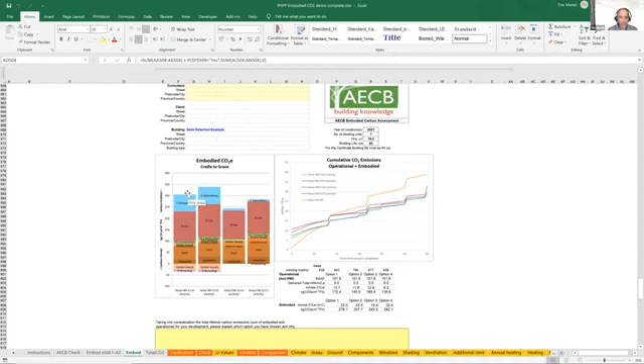If I cancel that, close that, I'll show you one which is finished. And what you get out of it is this. Now remember, we're in PHPP here, so anything we change in the thermal side of it will be immediately reflected in the embodied CO2.

It's also worked out the embodied part—this is the embodied part here, separated out into all these different sections. We're looking at 4 different scenarios here, we can have up to 4. Actually, I've cheated and rigged it so I can have a 5th on here, but normally it's 4. This is, incidentally, a heat pump without a retrofit versus 4 different types of retrofit, so that's quite interesting in itself.

Now, if we actually had the gas-powered original, then we would be showing an even more extreme graph where it would be off the scale. So it's really interesting to be able to show the operational side as well.

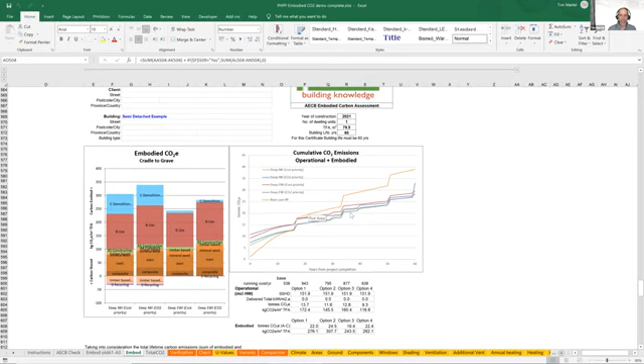You get a summary there, and there's also a RIBA tab you can show. Like the last one, you still have a section at the top where you can see where the CO2 is coming from—manufactured materials in that one. The redder ones are worse, this is a heat pump here, and the greener ones are better. So that's the 2 different versions.

So this is called PHribbon.

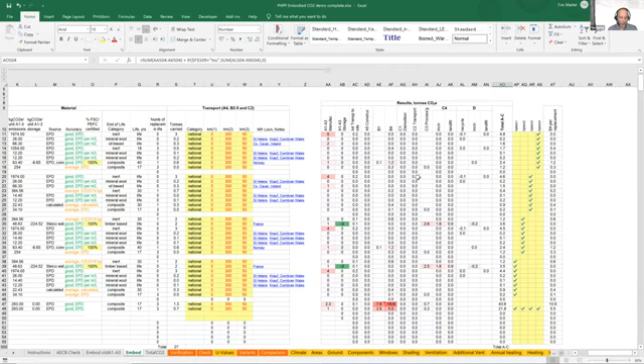I suppose I should just finish off by saying there are examples of this. There's plenty of examples, and this is the sort of thing you get if you do others. I'll end there. Thank you very much.

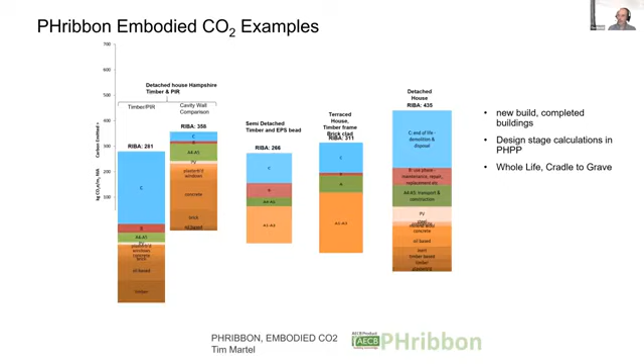Thank you, Tim. That was really useful. Tim, do you just want to say where your tools are available?